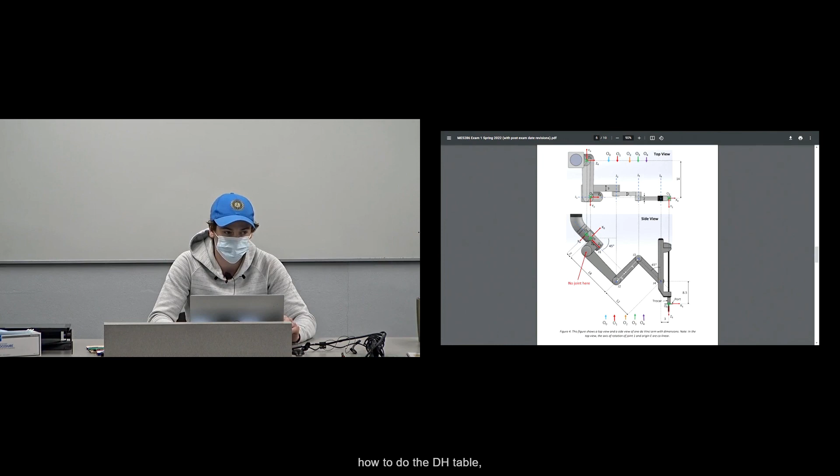Moving on. Like Professor Donath said, there was a bit of communication error, so we apologize for that. But like he also said, no one was punished with their grades for that. We made sure that if you showed understanding how to place origins, how to do the DH table, and how to write your A matrices, that you didn't lose any extra points, and you're actually given points for our mistake. So anyway, the main difference here, if you remember this figure from the exam, there were only 3 origins for you to place, O1, O2, and O3.

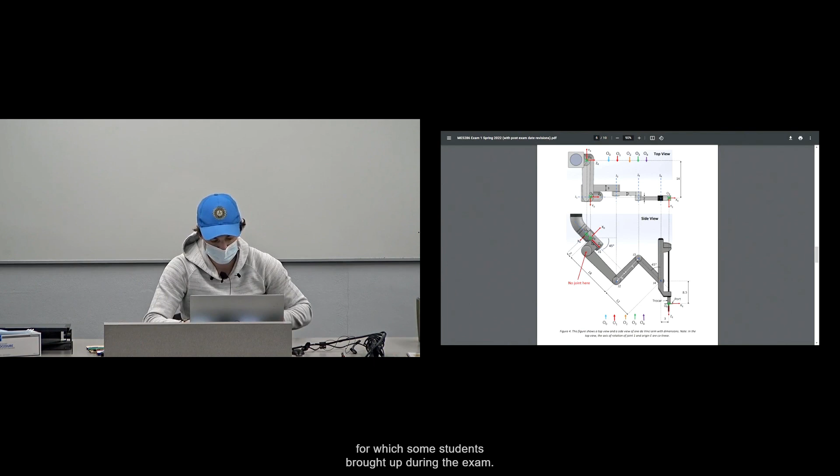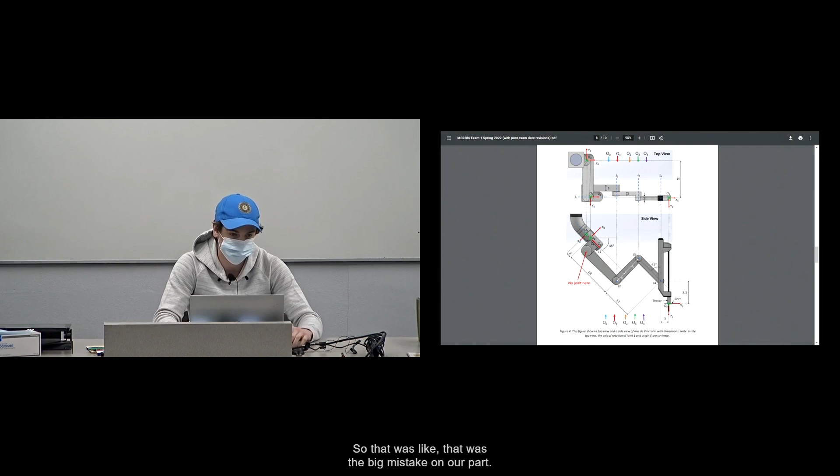In order to actually solve this problem correctly, you had to have an origin 4, which some students brought up during the exam. The reason we didn't include an origin 4 initially is because we're not considering a joint at the end effector. So really there shouldn't be a need for another origin. However, we need to get the z coordinate aligned with the z coordinate at the end effector. And the first solution with only 3 origins didn't have the z aligned. So really, to solve the problem the right way and get the right transformation matrix, we had to include another origin. So that was the big mistake on our part.

So essentially, if you showed understanding up until placing origin 3 and drawing coordinate frame 3, you should have gotten full points because there shouldn't have been any confusion up until that point. Okay?

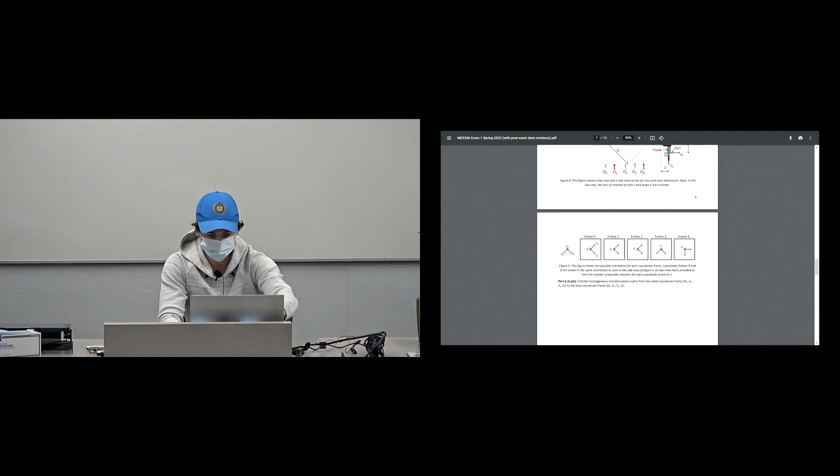So part A was pretty simple. It was a transformation matrix from the origin R, the robot frame, to the base coordinate frame. So if we're going to switch to the solutions here for a second, there was one rotation, and it was 180 degrees about r, or about z sub r, my mistake.

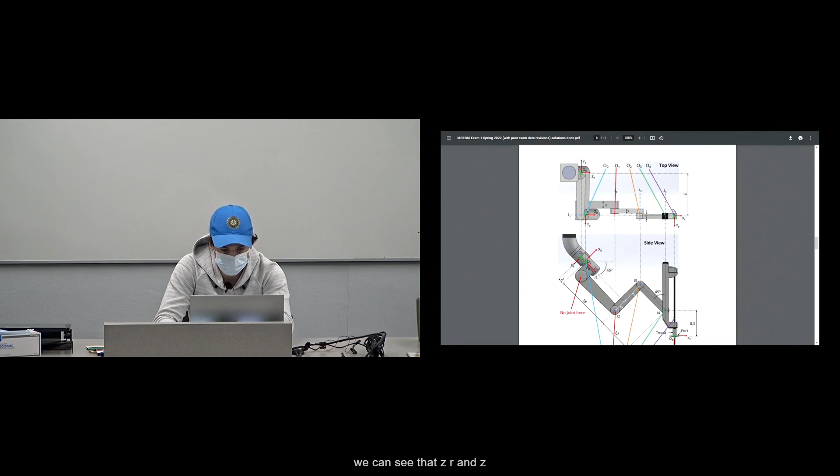So, using this view, we can see that zr and z sub 0 are pointing in the same direction, they're parallel. And to get that y sub r aligned with y sub 0, it's just a 180 degree rotation about z sub r. So pretty simple right-hand rule to figure that out. That's where this 180 degree rotation comes from. And then this R matrix, this rotation matrix, is for rotations about z. So just plug in 180 degrees and you get the first 3 by 3.

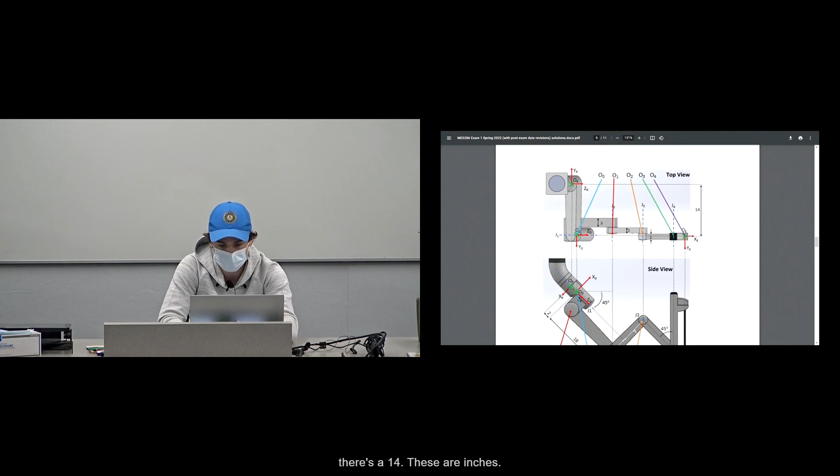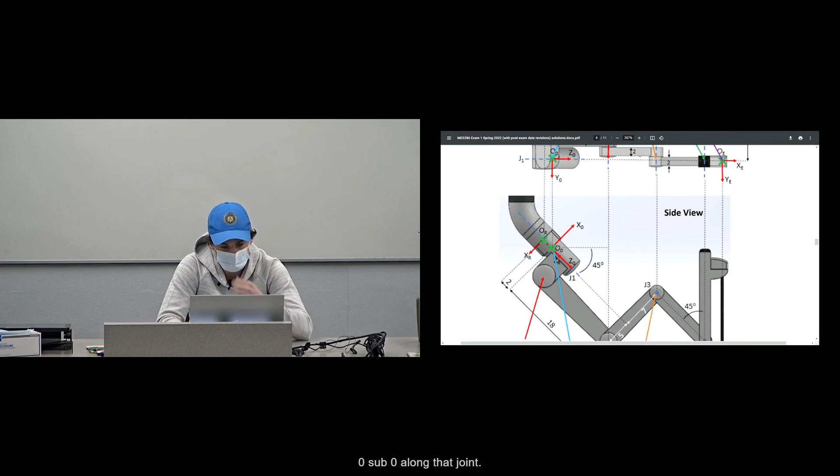And then the position vector. So we have a 0 degree or 0 translation from xr, negative 14 from yr, and 2 from z sub r. So again, going back to the diagram, we can see that if we zoom in here, that's a little blurry, but x sub r is normal to the distance or the displacement between the two origins. So there's no translation in x. If we look at the top view, there's a 14, these are inches, I'll just go with inches. There's a 14-inch displacement between OR and O sub 0, but since Y sub R is pointing away from origin 0, it's a negative 14. And then lastly, if we go back to the side view, Z sub R is pointing directly towards O sub 0 along that joint, and this distance is 2. So the translation in Z sub R is positive 2. And that is where this position vector came from.

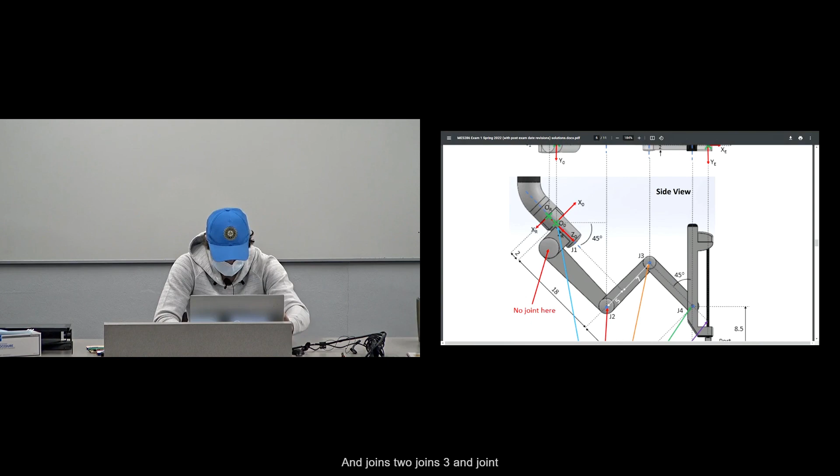And joints 2, 3, and 4 are all normal to the page, which is in the y sub 0 direction. So all the unit vectors to joints 2, 3, and 4 are just a positive 1 for y. Does that make sense?

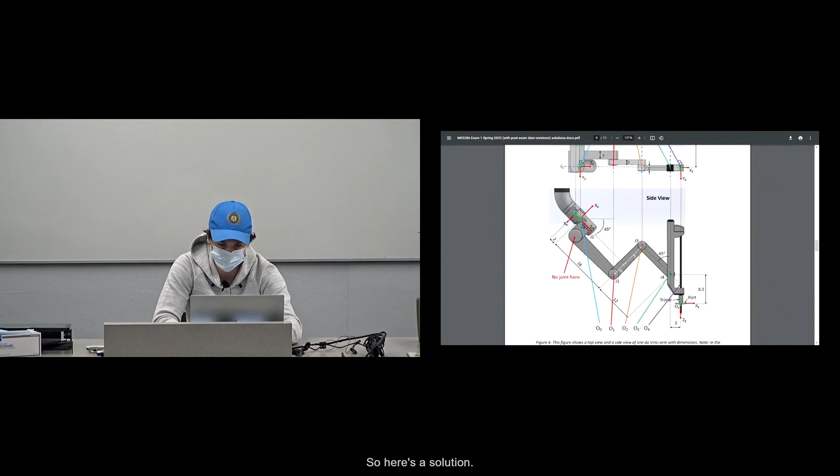Okay, part C is where some of the confusion started, I think, for some students. So this is where we have to place origins. And actually, up through origin 3, it should have been pretty simple. So here's a solution. Origin 0 is already placed, just to give you guys a freebie there.

We know origin 1 had to fall along joint 2, or the axis of rotation of joint 2. That's the first rule. So in the side view, we know it has to be at this point, just because joint 2 is normal to the page.

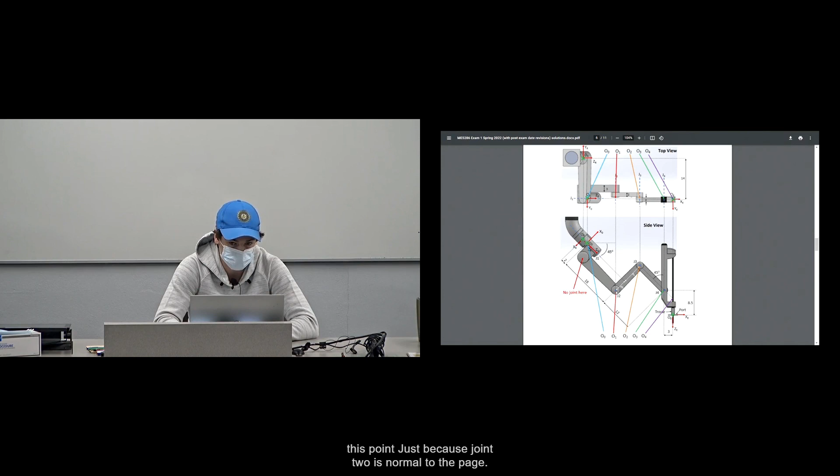And then in the top view, origin 1, again, along joint 2, had to fall in line with origin 0, along this dashed line that's horizontal. Pretty much all the origins fell along that line.

Origin 2 and origin 3 are the same story as origin 1. They fall on joints that are normal to the page. So in the side view, they're all going to be right on the joint axis. And then in the top view, they all have to line up with each other. So O3, O2, O1 all lie on this dashed line.

And for the exam you took, that's as far as you had to go for placing origins. But in order to get the true correct answer, we added an origin 4.

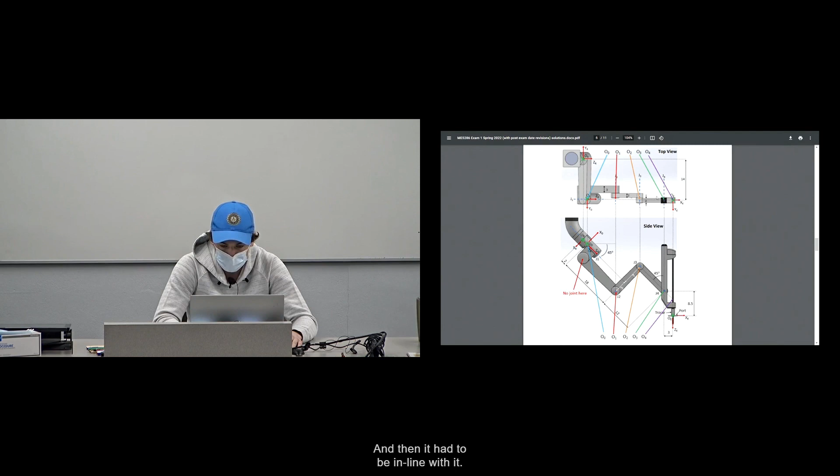So in the top view, origin 4 had to line up with origin 3, somewhere on this dashed line. And then the z direction of origin 4 is going to have to line up with the z direction of origin E. So it has to be along this vertical line that represents the instrument shaft.

So we placed it right here. This is blurry, but you can see we placed it right here, which would place it right above the origin E on the top view as well.

And again, you did not have to do that on the exam. If you tried placing an origin 4, you were given full points. As long as you got through origin 3 correctly, you were given full points.

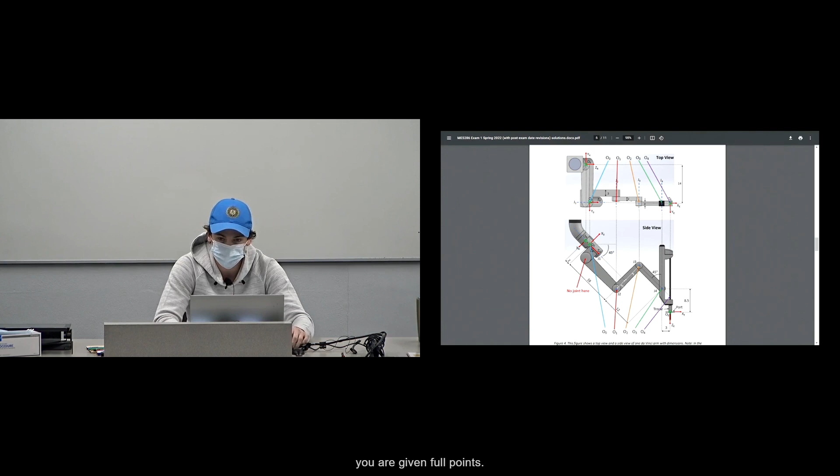And then the other part of this question was finding the coordinate frames. So here's that. You were given coordinate frame 0 and coordinate frame E, so we'll start with coordinate frame 1.

We know that z sub 1 has to fall along the axis of rotation of joint 2 because origin 1 is at joint 2. And since joint 2 is normal to the page, z1 is normal to the page. So these arrows are just going to be either x or y.

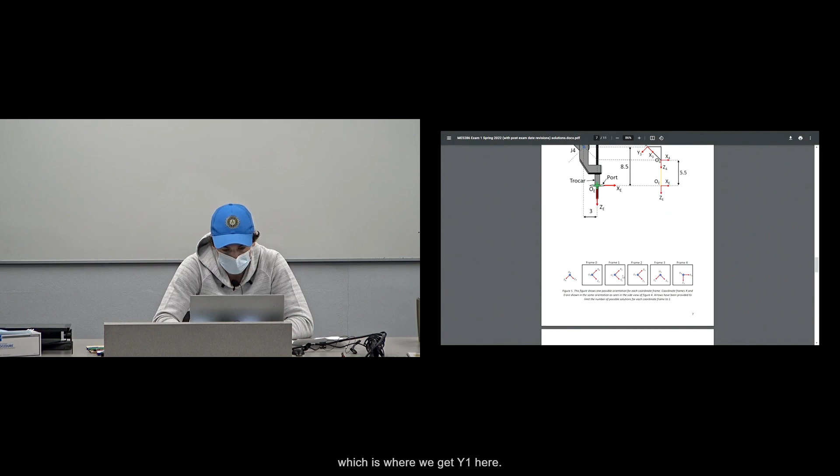Then y1 has to be parallel to joint 1. That's another rule. So in this view, joint 1 is at this 45-degree angle from the horizontal, which means y1 is also going to be in that same direction, which is where we get y1 here. And then since we have z and y, we can just find x. That's how I solved that one. Any questions so far?

All right, for origin 2, it's pretty much the same thing. So z2 has to fall along the axis of rotation of joint 3, which is, again, normal to the page in the side view.

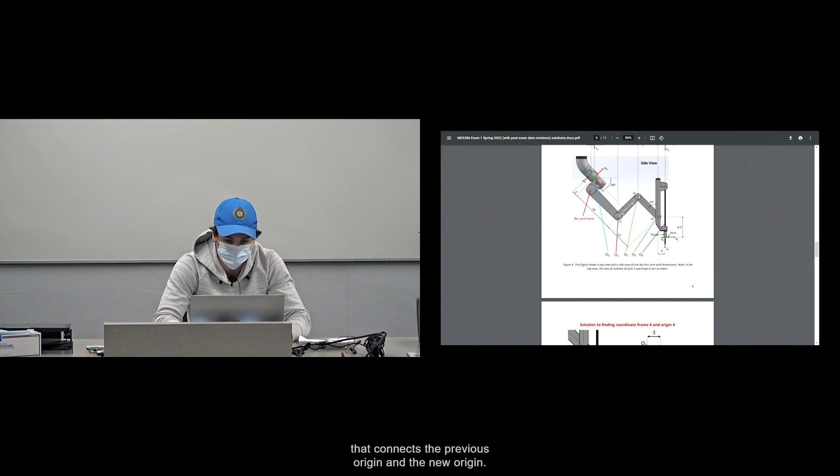And then this is one of those situations where y2 can't be parallel to j2. I went over this in the review slides. One of the rules when this happens is that x2 has to pretty much be in a direction that connects the previous origin and the new origin. So origin 1 and origin 2, x2 has to be in some direction along this line. That's where I got x2.

So in this situation, you solve for z and x first, and then place y based on those.

For coordinate frame 3, we have origin 3 along joint 4's axis of rotation. This is a similar situation where x has to connect joint or origin 2 and origin 3. So if you can see my cursor, it has to fall along this dashed line, which is where x3 comes in. Since we know z3 is into or out of the page, we can use the right-hand rule to find y3. If you got everything correct up to this point, you were given full credit for this question.

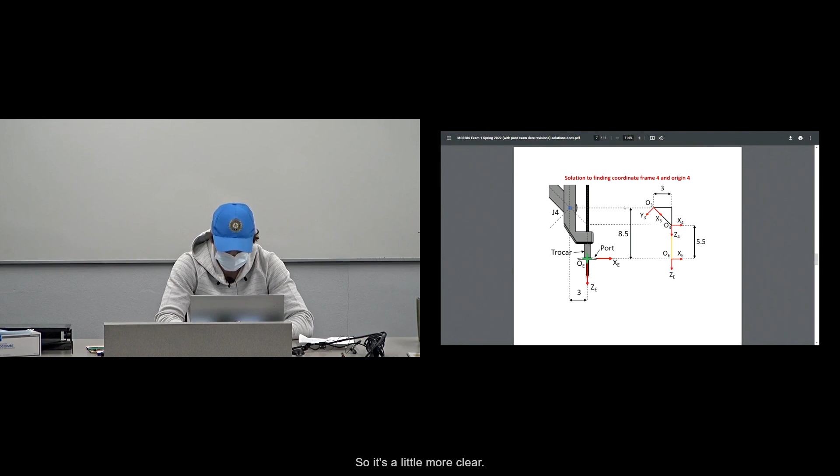I'm just going to go through how Professor Donath and I solved for coordinate frame 4. This diagram is how we did it. I placed coordinate frame 3 here, offset so it's a little more clear. Coordinate frame 3 is placed at joint 4, and we know that the z direction of coordinate frame 4 is going to have to line up with the z direction of coordinate frame E. So we know that origin 4 has to fall along this vertical line to fall in line with origin E.

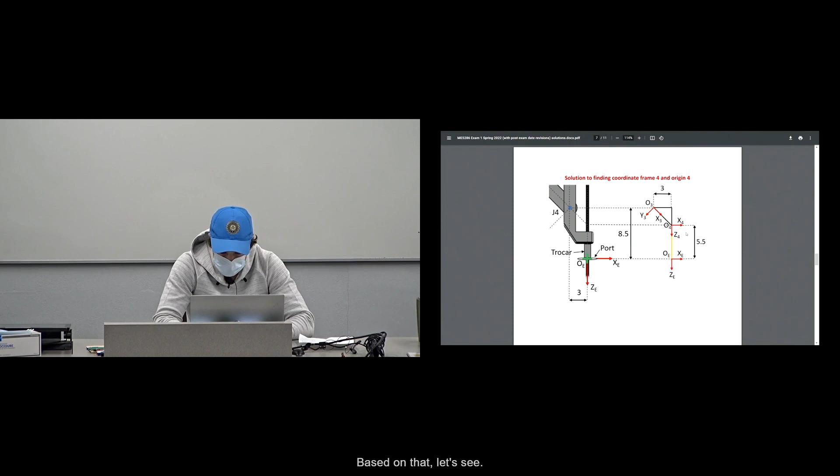Based on that, let's see. We wanted this final translation between 4 and e to be just a d in the DH table, so x4 and xe line up as well. And then y4 is just going to be, let's see, what would that be? It'd be out of the page, same with y sub e. Placing it here gave us the correct transformation matrix later on in the exam.

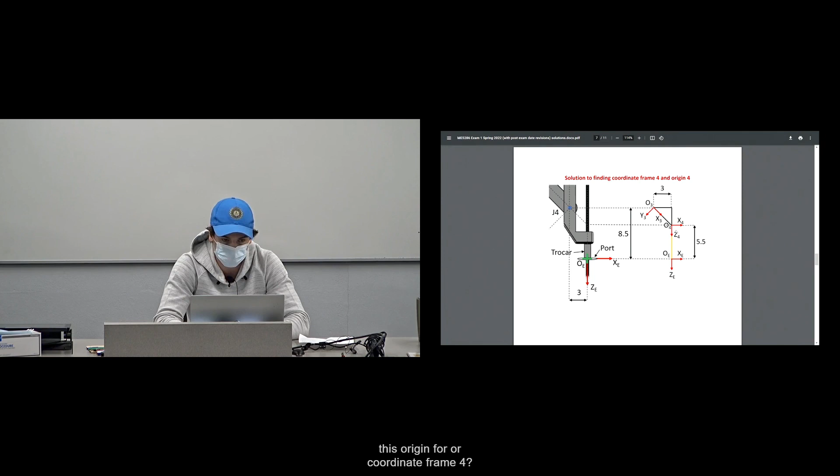Are there any questions how we got this origin 4 or coordinate frame 4? And again, if you got up through origin 3, you were given full points, so no need to worry there.

All right, we'll continue on. So we're through part C. Part D was the DH table, and again, a lot of students had a different answer for joint 4, but if you showed you knew how to do the DH table through joint 3, you were given full credit. We added another row here, which obviously was not there in the exam, but you need this extra row because we added an origin 4.

Okay, so I will run through how we solved for the DH table. Joint 1, we start with theta 1, which is the rotation about z sub 0 to move from coordinate frame 0 to coordinate frame 1, and there is no rotation about z. Let's go back. Again, moving from this coordinate frame 0 to coordinate frame 1, there was no rotation about z. We had a positive 90-degree rotation about x sub 0, so if you do the right-hand rule, that will get y sub 1 pointing down like it is here. So the only rotation for joint 1 was positive 90 degrees about x, which is the alpha value.

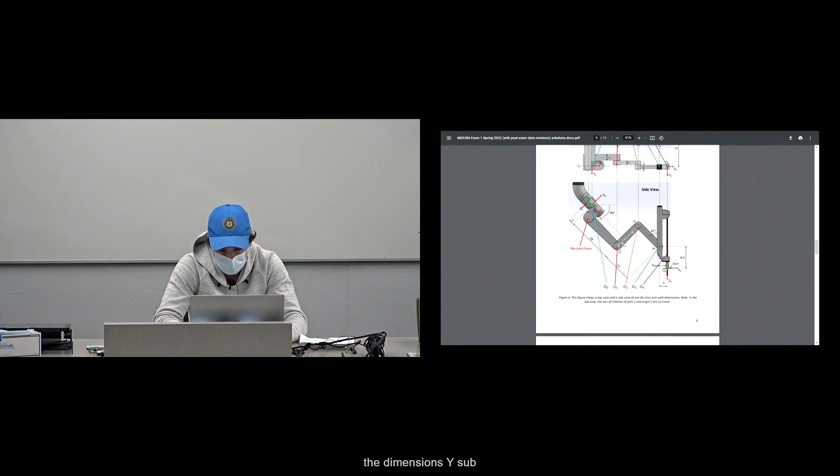Then to find d and a: d sub 1 is the distance. The way I solve it is the distance in the y sub 1 direction from origin 0 to origin 1. Again, y sub 1 is pointing down and to the right. And if we go back to the diagram with the dimensions, y sub 1 would be pointing down and to the right, and the distance in that direction from origin 0 to origin 1 is this positive 18.

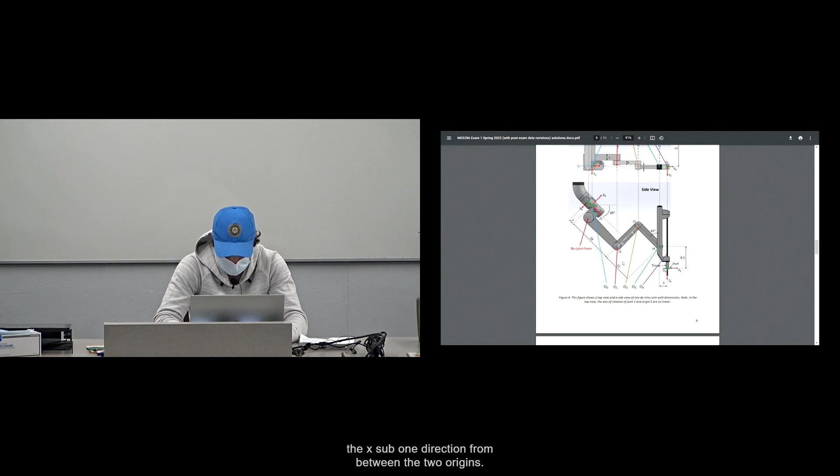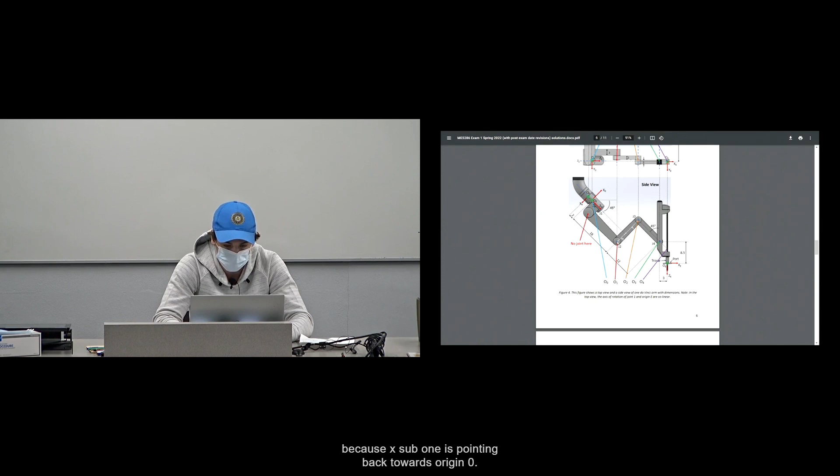And then a sub 1 is the distance in the x sub 1 direction between the two origins. So if we go back to the coordinate frames, x sub 1 is pointing up and to the right. This distance is 5, but since we're looking at moving from origin 0 to origin 1, this value is actually going to be negative 5 because x sub 1 is pointing back towards origin 0. So d and a are going to be positive 18 and then negative 5.

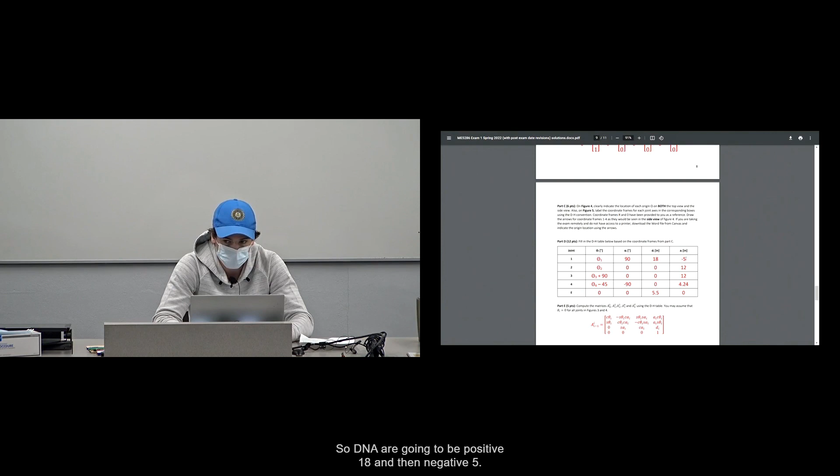Anybody got questions on that? Okay.

For joint 2, theta sub 2 is the rotation about z sub 1 to get from origin 1 to origin 2. As you can see, the coordinate frames are set up the exact same, so there's not going to be a rotation about z or x. So theta and alpha are both 0.

Then d sub 2 is going to be the distance in the y2 direction from origin 1 to origin 2. If we go back to the solution, origin 1's here, origin 2 is here, and y2 is pointing down and to the right, so there's actually no distance along y sub 2. That's why d2 is 0. And x2 is pointing up and to the right, so since a sub 2 is the distance in the x2 direction from origin 1 to origin 2, that's going to be positive 12. So it's 0, 0, 0, and 12.

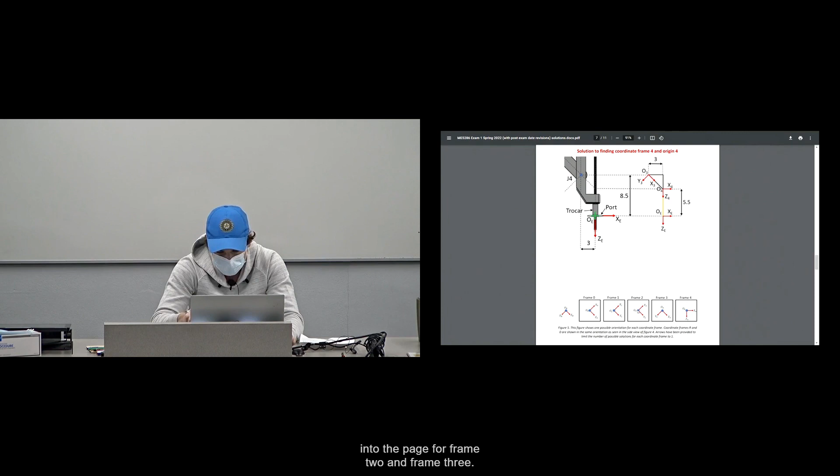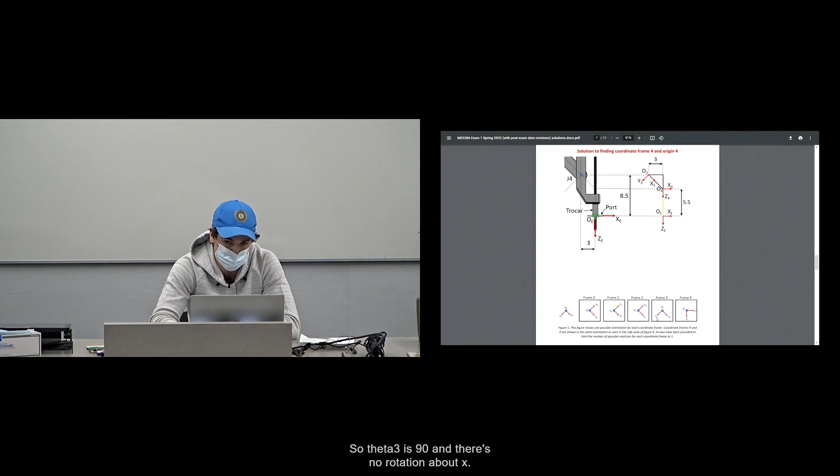For joint 3, looking at theta, it's the rotation about z2. Z is into the page for both frame 2 and frame 3. Since frame 3 is a little different orientation than frame 2, but x and y are still in the plane, we know there's a rotation about z. So a positive 90 degree counterclockwise rotation about z2 lines up x2 with x3 and y2 with y3. So theta 3 is 90, and there's no rotation about x, so alpha 3 is just 0.

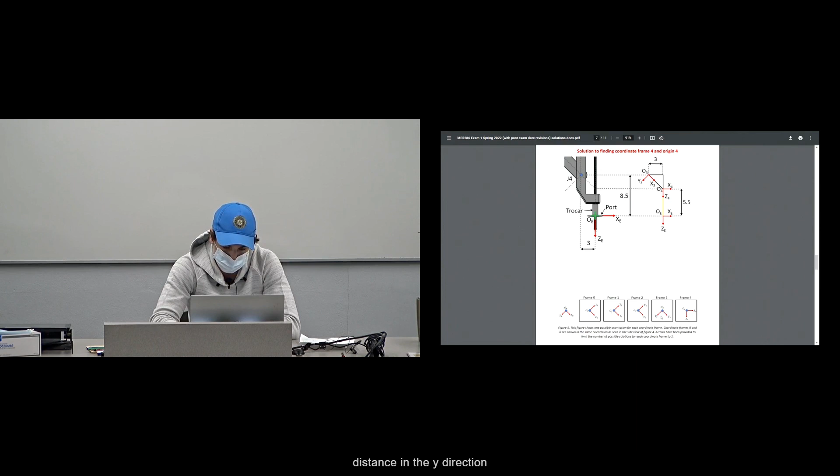D3 is going to be the distance in the y3 direction from origin 2 to origin 3. Going back to the diagram, y sub 3 is pointing down and to the left, and that's normal to the displacement between origin 2 and origin 3. So d sub 3 is also 0.

Finally, x sub 3 is pointing down and to the right, and a sub 3 is the distance in that direction from origin 2 to origin 3, which is a positive 12, as seen here. So we're going to have a 90 degree rotation for theta, 0 for alpha, no d, and 12 inches for joint 3.

To reiterate, if you showed that you knew how to do the DH table and got joints 1, 2, and 3 correct, you were given full points for joint 4, no matter what you put. We're still going to solve for joint 4, though.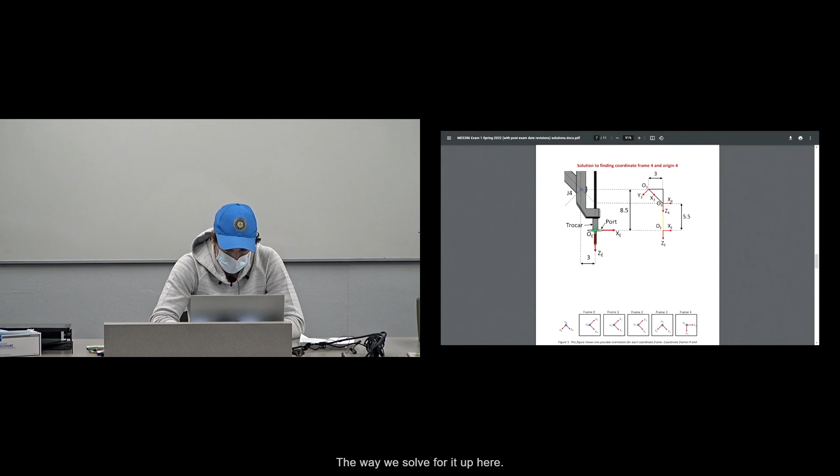The way we solve for it: we have y sub 3, x sub 3, and then we need to get z sub 4 in the plane, so we know there's going to be a non-zero alpha. The first step is solving for theta, which is again rotation about z sub 3, which is into the page here. The goal of this rotation is to get x sub 3 and x sub 4 parallel, so we have to rotate 45 degrees to get x sub 3 along the horizontal.

When we do that, y sub 3 is pointing down, and we know we need to get z4 pointing down, so there has to be a rotation about x sub 3, and that's going to be negative 90 degrees. So that's how we get the angles for joint 4.

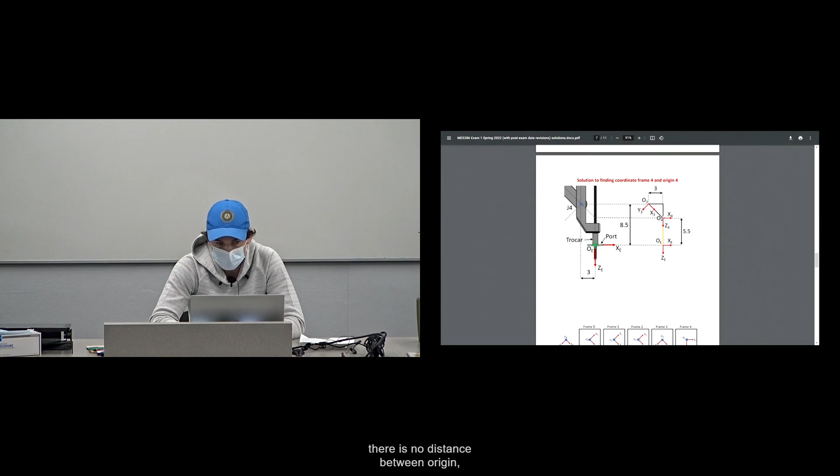For D4, there is no distance between origin 3 and origin 4 along y4, because y4 is now coming out of the page and they're collinear in the plane. So D4 is 0.

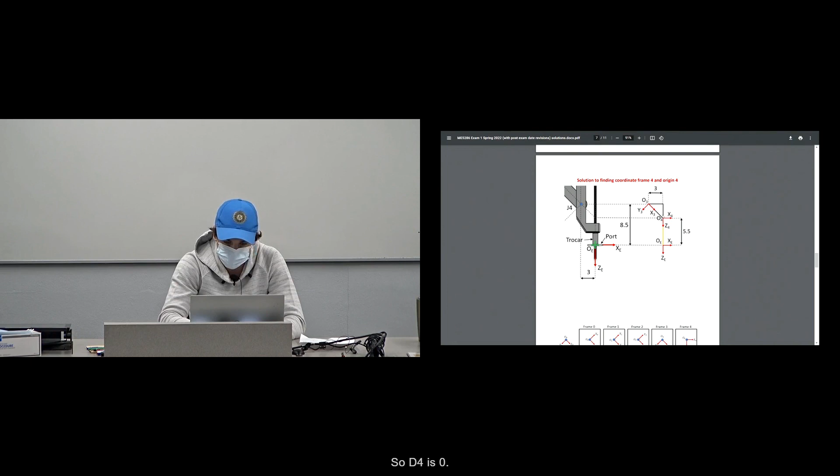A4 is, since there's a 45 degree offset here, A4 is the hypotenuse of this triangle, and that's just 4.24 inches.

The last row is just translation from joint 4 to joint E, or origin 4 to origin E. Since the coordinate frames are now lined up, there's just a 5.5 inch translation, and that's the D value. So that's how we solve the DH table.

Everyone's going to have a different answer for joint 4 most likely, because there was some confusion. But if you showed you knew how to do it from joint 1, 2, and 3, you were given the points for joint 4. We wanted to make sure no one was punished for our mistake.

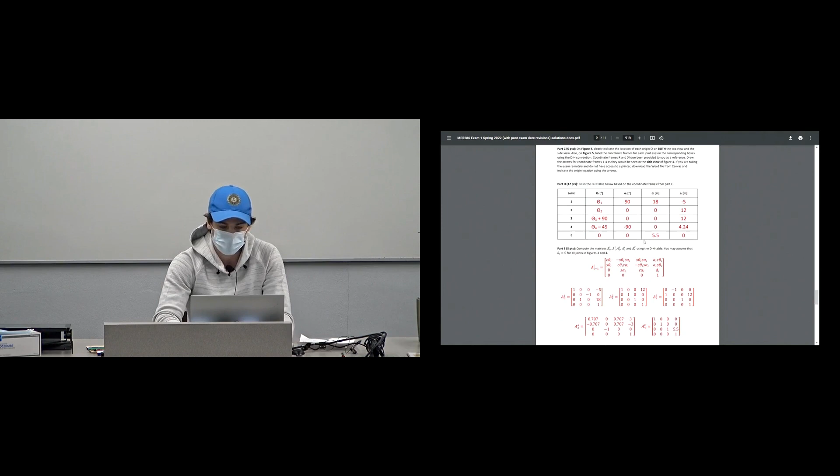This new exam, since there's another row of the DH table, we added a matrix to find. This is pretty simple, it's just plug and chug from the DH table.

There are a few examples where students got wrong answers in the DH table but still found the A matrices correctly based on their DH table values. You were given, I think, half credit for knowing how to do it and having the correct method. You lost some points though for having the wrong DH table.

But anyway, again, it's just plug and chug, no need to really go over how we got it. As long as you did the correct method, which is this matrix right here, you likely got full points.

Part F was just a matrix multiplication sequence to find the transformation matrix from the robot frame to coordinate frame 3.

So we solved for the transformation from R to 0 in part A. That's the first step. And then just multiplying by 3 A matrices, you see the zeros, the 1s, and the 2s cancel, and we're left with the transformation from R to 3. This one was pretty straightforward. Anybody have questions about that or anything else I've gone over?

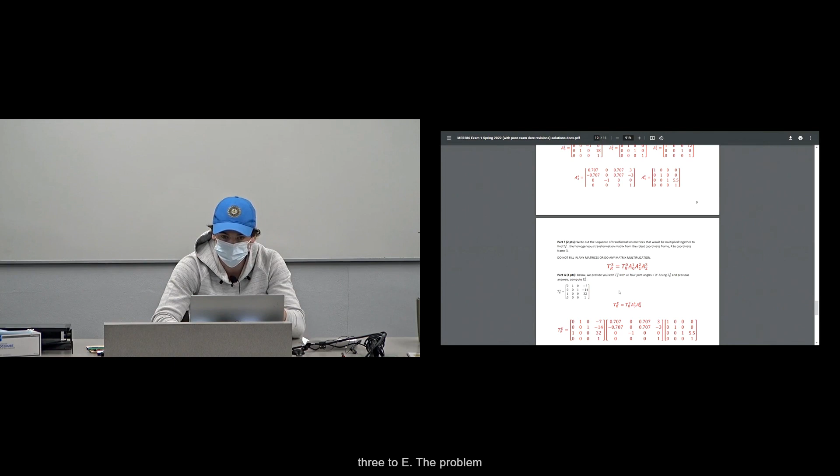Moving on, part G. This was one where you had to multiply—in the real exam you took, you were given TR3, and then you had to multiply that by the A matrix from 3 to E. The problem is, since there was an issue with the exam, the joint 4 row of the DH table was different for everyone, and that's where you got the A matrix from 3 to E. So there were a wide range of answers for part G. If you showed the correct multiplication sequence, you were given full points for this part. It didn't matter what your final answer was, as long as you showed you knew how to get that transformation. That's all you needed to show.

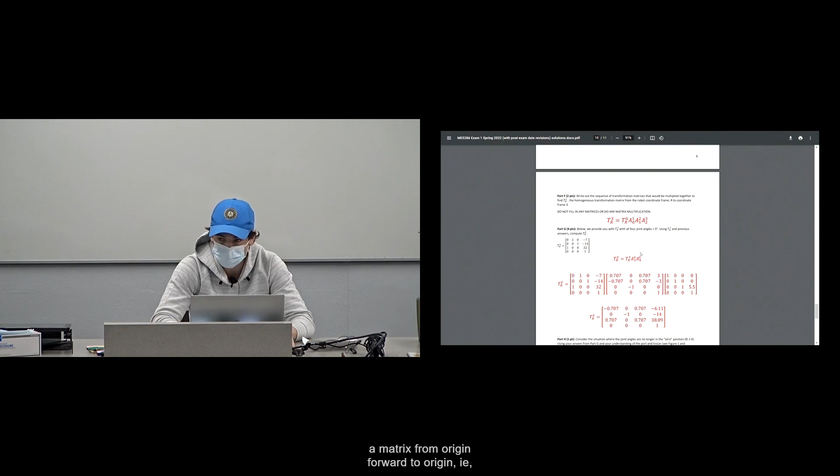For this exam, though, since we added a row and there's now an A matrix from origin 4 to origin E, we'd have to multiply the transformation from R to 3 times 2 A matrices, as seen here. And this is the final answer.

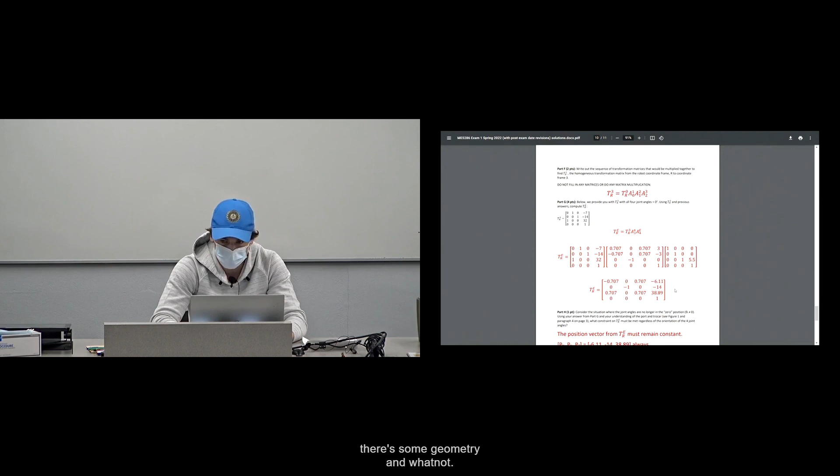One way to check—so a few students brought this up during the exam—when they solved this transformation matrix, they got a y that was not negative 14. If we go back to the diagram on this top view, since all of these origins are in line, we know that the position vector, or the distance in y sub r to the end effector, has to be negative 14. That was kind of what tipped me off that there might have been a problem here, because intuitively this has to be negative 14 just based on the schematic. Obviously the x and z are a little more difficult to solve because there's some geometry involved, but since there's a negative 14 here, that should tell us this is likely the correct transformation matrix.

To reiterate, if you showed the correct multiplication sequence, you were awarded full credit for this part.

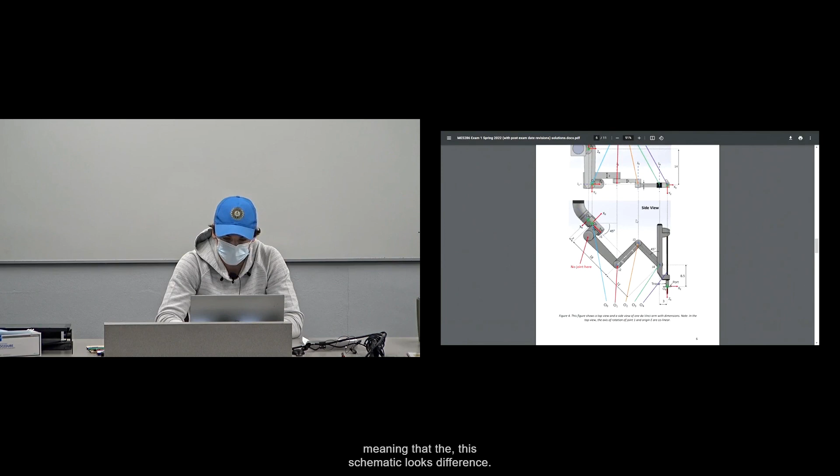The last part of problem 1 tested your understanding of the robot and made sure you were reading about it in our description. So if we're considering a situation where, let's say, the joint angles are non-zero, meaning this schematic looks different—let's say it could be anything, joint 2, joint 3, and joint 4 could be at a different angle—the question is asking what about this transformation matrix has to stay the same.

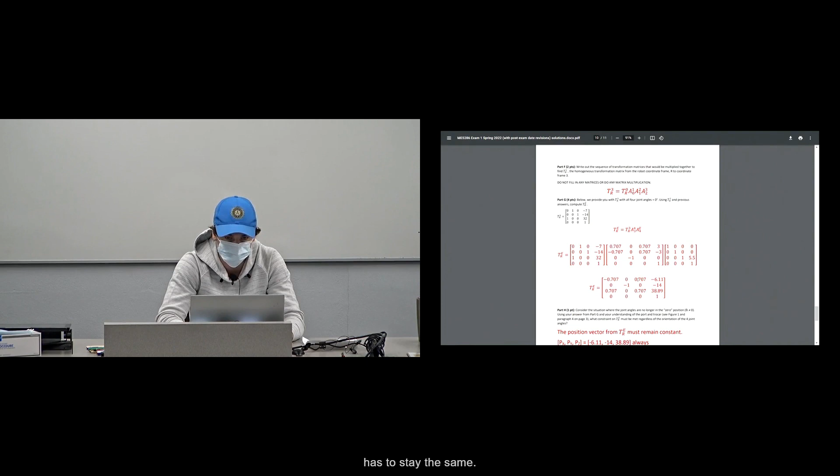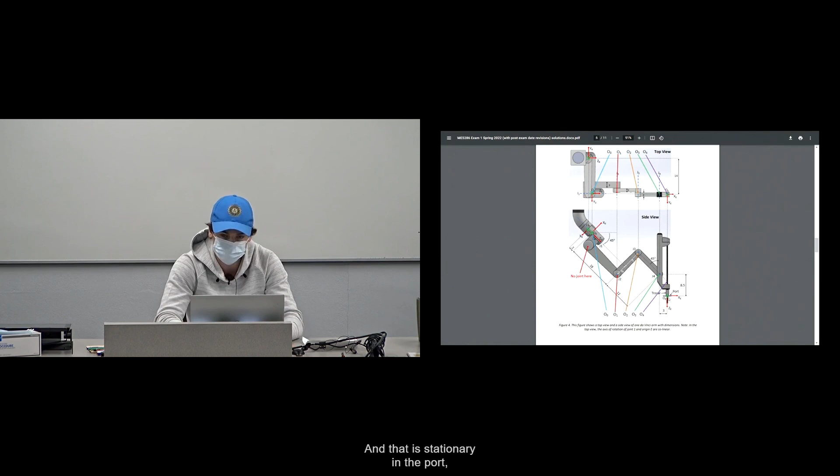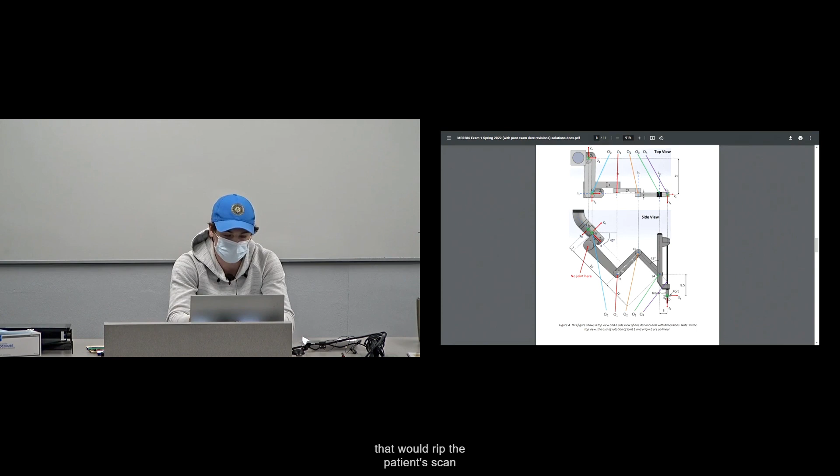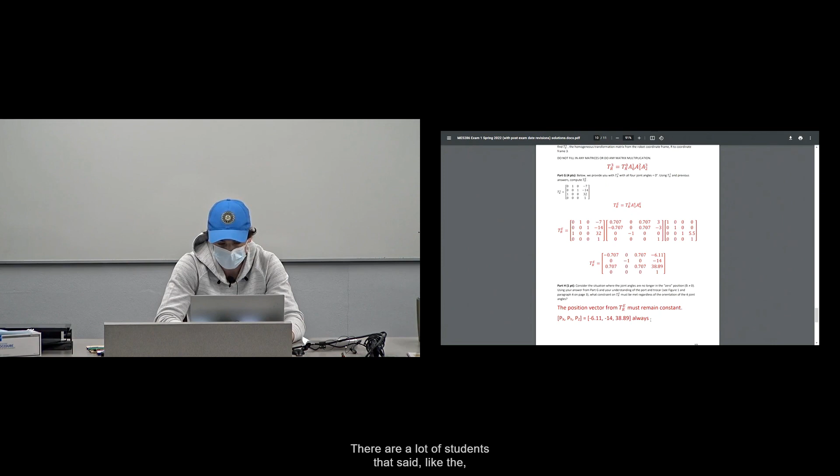And the position vector cannot change. That's because, if you remember about the robot, the trocar here is where the end effector is, and that is stationary in the port, which is essentially the incision in the patient. We consider that like a spherical joint about the port—it can twist all sorts of ways, but it cannot move or translate anywhere, because in a surgery that would rip the patient's skin or cause damage. So we were looking for something about the position vector. There were a lot of students that said the Z had to stay the same. If you were one of those students, you got partial credit, but really the entire vector itself can't change, no matter what joint angles you have.

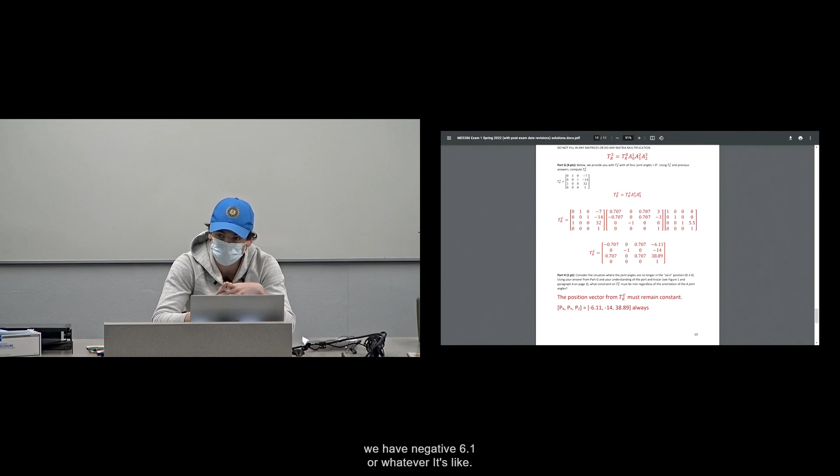Is that clear? So if we didn't have the negative 6.11 or whatever, it's fine as long as we said Px, Py—yeah, you got full points for that. If you said position vector, if you said Px, Py, Pz, if you put your values but they didn't match up with what I had, it didn't matter. You still got full points.

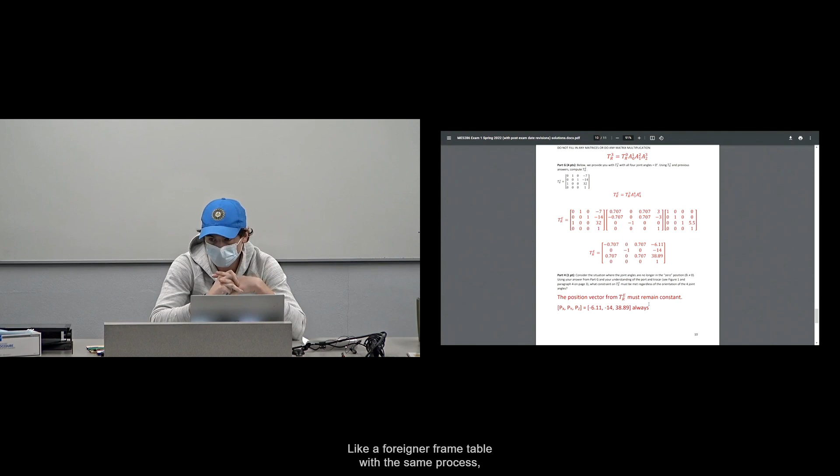So the question I have about the test in general—if you mess up something with a coordinate frame, which leads to a wrong transformation of the DH table, but you did the same process correctly, which then led you to the wrong answer in the matrix multiplication, is that kind of... that's probably a severe mistake?

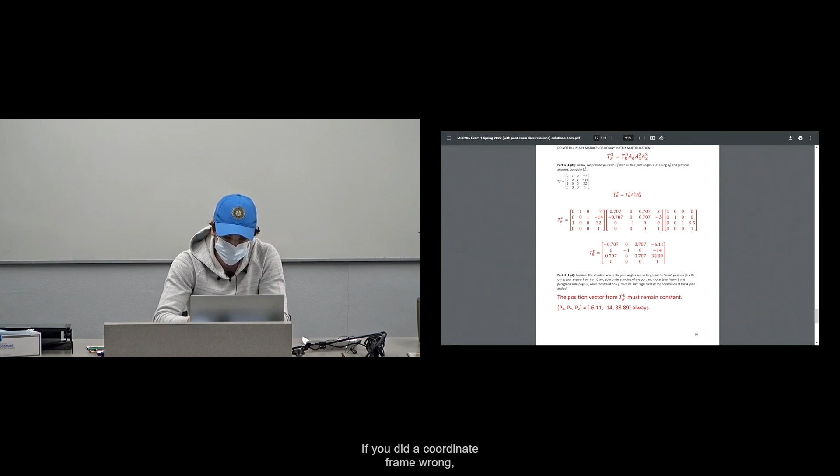Well, for matrix multiplication in part G, if you had the right sequence, you got full points. If you did a coordinate frame wrong, it cost you a little bit. You still got some credit for doing the correct method, like the DH table and the A matrices. Does that make sense? Yeah.

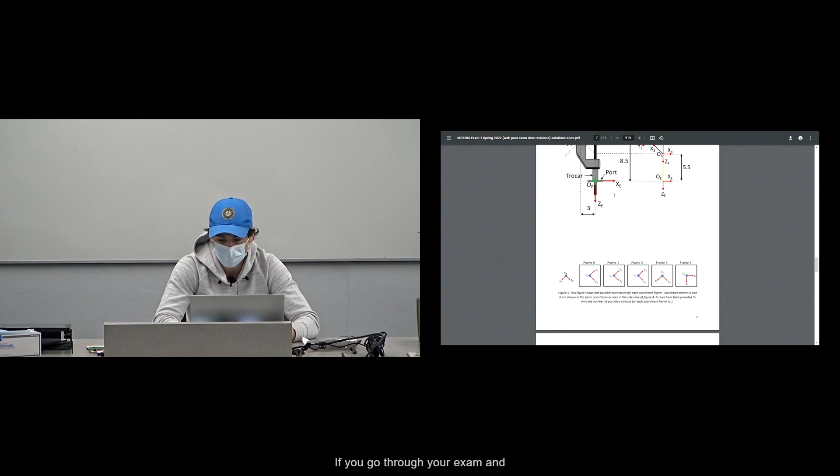Okay, so I get that this is kind of step-by-step, each step depends on the previous step. So if you placed origins wrong, that's going to affect everything. If you did wrong coordinate frames, it's going to affect things. But we tried giving partial credit for your method. Make sense? Yeah. And if you go through your exam and you have an issue with it, just let me know, and I'll try and work that out.

If there aren't any questions on question 1, we'll move on to problem 2. This was just roll, pitch, yaw, multiple conventions. There were a bunch of right answers I saw for part A. Most people got this question completely right. I just listed 3 solutions I saw in the exam that gave the right orientation of the coordinate frame 4 here.

For part B, there are 2 possible situations given here. Some students did an X, Y, Z rotation, and some students did a Z, Y, X rotation, both of which were fine, they were correct answers. I just listed 2 Z, Y, X rotations here that are correct.

Anyone have any questions about the roll, pitch, yaw? It seems like the class was pretty clear on this concept, which is good to see.

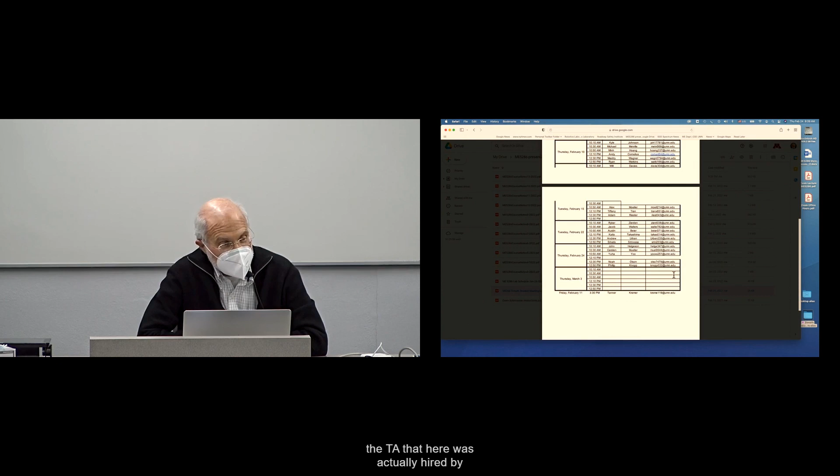I should point out that a number of years ago, I won't say what year, but we had an exam that dealt with this type of surgical device, a predecessor of the company that now makes the particular machines used in the exam. And if I remember correctly, the TA that year was actually hired by that company when they graduated and moved off to California. Anyway, it's an interesting machine.

What I do suggest, we're going to post the solution on the web. I do want to go over with Robert a few little things before he posts them, so it won't show up quite yet this afternoon, but I hope it'll be posted by tonight so you can take a look at it. I do appreciate that you need to spend some time looking at it. You can't just follow it all in the few minutes that he was presenting it. You need to do your own thing with understanding where the X, Y, Z's move their way around from beginning to the final E vector where the trocar is in the machine.

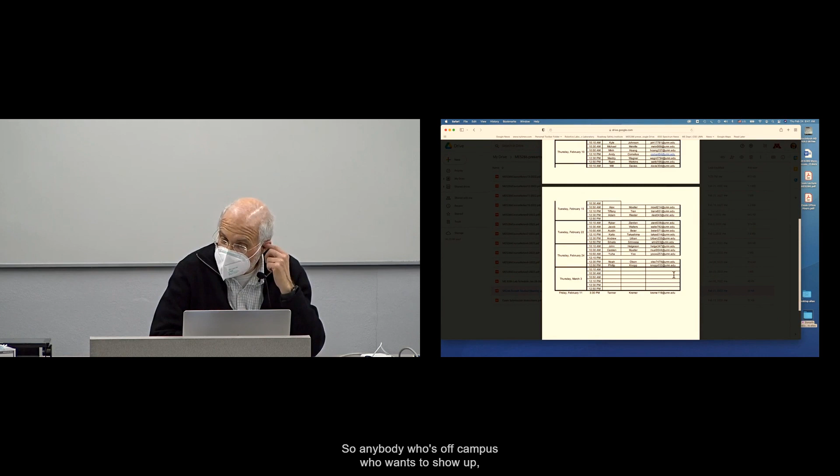It's Thursday today. Next Tuesday, I am going to bring some instruments into class. So anybody who's off campus who wants to show up, you can come next Tuesday, and I will bring instrument shafts through. Those instrument shafts add another 5 degrees of freedom. So beyond what you saw in the exam, there are another 5 degrees of freedom that are controlled by the surgeon directly through a teleoperated arrangement. I will show you what I'm talking about next Tuesday. But that part was not part of the exam, and you don't need to know it. I didn't want to confuse anybody by getting into all the details of that portion.

What I mean by that is, if I have a robot, and now we're talking about a robot that makes contact with the world - I'm doing stuff, and I have, for example, got a pen, and I'm actually making contact with the world, and there's going to be forces that push back. There are reaction forces over here.

What is the propagation of these reaction forces to the individual joints? In other words, what is the torque at each joint that either is going to generate the reaction forces, or if I have certain reaction forces that I can measure, what must the joint forces or torques be?

Now why is that important? Well, notice I use the word static. We're basically talking about a situation without the dynamics. We'll get to dynamics still in the discussions. When we talk about dynamics, then we need to worry about inertial forces, Coriolis and centrifugal forces, and all sorts of other forces that play a role.

But if I'm talking about static conditions, we're talking relatively slow motions - just like if you were doing isometric exercises, pushing up against the wall and exercising yourself, you're not moving through large motions. We're basically thinking of it as being a rigid body in some sense, and we're trying to calculate what the reaction forces in the system are.

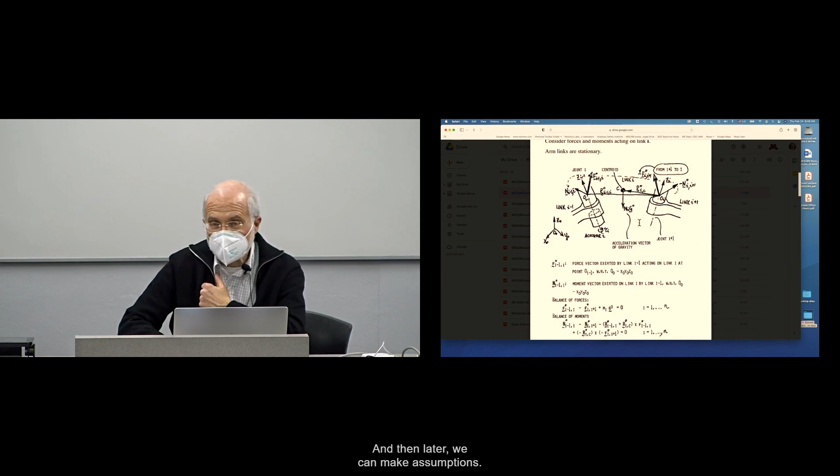So if we look at all the forces and torques going on, we haven't talked about gravity yet, but if we're beginning to talk about a system that has mass, we're going to add the gravitational term. I'm bringing this up because we will bring up gravity when we start talking about dynamics, and we cannot ignore gravitational terms. Right now, we're going to include it just to explicitly show it, and later we can make assumptions about whether we consider the gravitational effect or not.

If we're dealing in this direction, gravity is important. If we're moving in this direction and you have suitable bearings to handle all the reaction forces, then the gravitational effect is not that big a deal, unless you're talking about a very large mass at the end and you haven't designed your robot appropriately, and it's actually flexing under load, in which case gravity is certainly a big deal.

So if we're talking about rigid components, rigid links, no slippage in the joints at all, then we're going to basically have the coordinate system with the center O sub I minus 1, and here's O sub I. There's Z sub I, here's O sub I minus 1, there's Z sub I minus 1. Now what we need to add, as soon as we throw in a gravitational term, we're going to have to worry about the centroid.

The centroid of this link, of the mass, essentially the mass effect, basically mass times the gravitational vector, is going to act through the centroid of that particular link. Calculating where that centroid is, is not an easy thing, and we're not going to need to calculate it for the analysis we're going to talk about. But I'm showing it to you explicitly, if we were going to throw in the gravitational terms, I'm just going to show you where it appears.

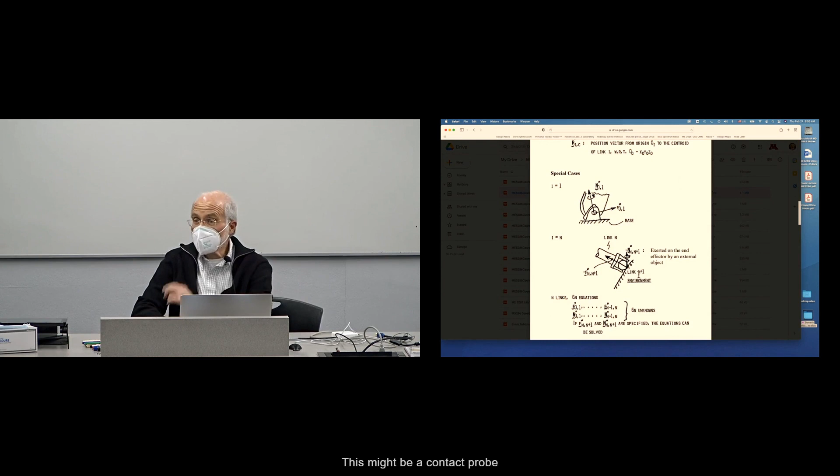If you look at the end conditions, at the base of the robot, there's going to be some reaction forces and torques. You might put it on an instrumented platform and measure those, for example. And then you have the end effector, which may be holding something. This might be a contact probe that you're pushing into the wall, or a piece of chalk scratching across a blackboard. It's doing some activity where you're interacting with the world, so there is going to be a force and torque applied by the outside world back on the robot itself.

We're going to take a look at some examples later on. I'm going to take you to some websites, but there are companies whose mission is to control exactly what the forces and torques are as you apply to a surface. Typically, grinding is such an application—there is robot-controlled grinding of surfaces, polishing of surfaces. There are many activities where you have to apply forces in a controlled manner to a surface.

What you might be doing is pushing with a constant force against the surface here and not applying any force in that direction, again depending upon what the objective is with your tool.

If we take all of this together, spell everything out and write it out, we're going to get an unbelievable amount of equations. Because remember, if we just look at the forces, if there are n joints, we're going to end up with 6 times n unknowns just from the forces—3n unknowns, and then we add the moments, we get another 3n unknowns. Together, we have 6 times the number of joint unknowns we're trying to solve.

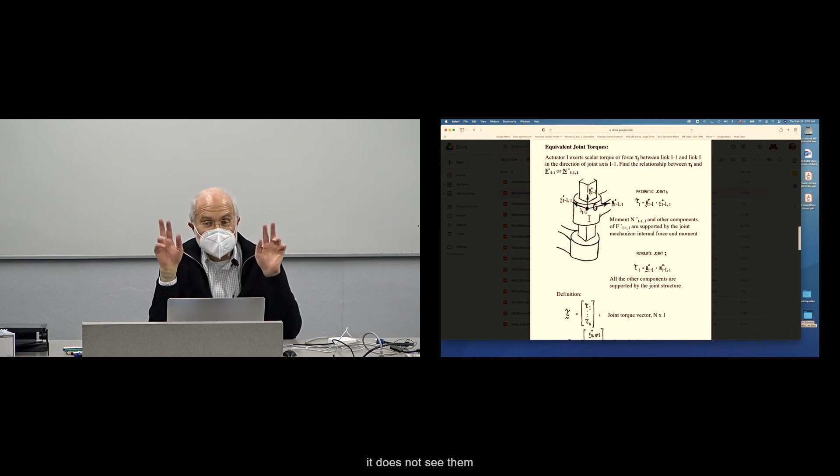It's going to be dotted, so to speak, with the unit vector. So in effect, this revolute joint, the motor, the actuator, and the transmission, whatever is being applied at that particular joint, its mission is to handle the components of the reaction moments applied at the joint, via the dot product, acting along or about that particular unit vector. If there are moments not in the right direction as far as the motor is concerned, it does not see them, because the structural elements of the robot, the bearings designed into it, pass them down to the ground and they are never seen or felt by the motor.

Now later on, we're actually going to do a pretty detailed analysis where we're going to include the effects of a transmission, but we're going to do that much later on, and I'm going to show you that the transmission ratio in a transmission plays a very important role in robots.

We want to have a transmission. The transmission does a lot — call it a gear ratio or the transmission ratio. It's going to have a very positive effect on our ability to control and move a load around in space. But for right now, keep in mind we're dealing with static conditions, no dynamics, and because there are no dynamics, we're not going to be concerned with inertial effects.

When we talk about dynamics, we're going to need to worry about inertial effects, Coriolis and centrifugal forces and all sorts of other things. But we're dealing with a rigid structure. There's no compliance in the joints, or we're going to say no compliance in the transmissions. And in effect, we're dealing with static force conditions — there's no dynamics playing a role.

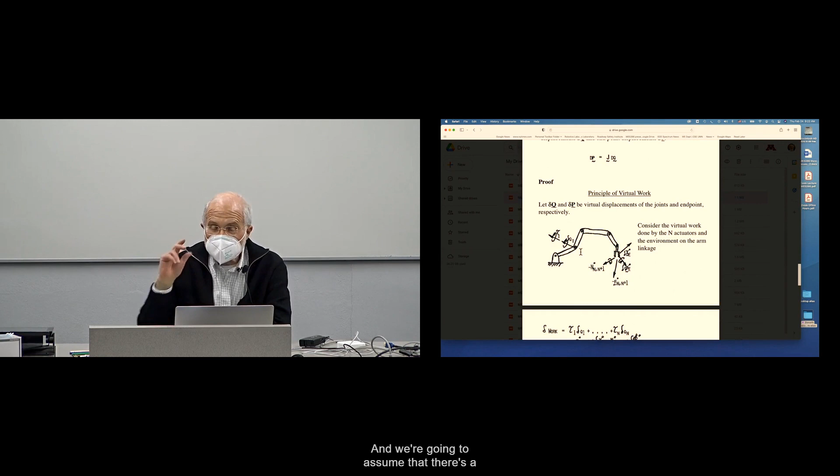This looks like a very complicated deal. It isn't as complicated as you think, because at each motor, what do you have? We're going to have a torque. Let's say it's the revolute joints. There's a revolute joint, and we're going to assume that there's a very small—and we'll see—very small angular change at that particular joint.

So there's a tau sub i and a del Q sub i. That means at the motor, there's going to be a tiny rotation and a torque. And together, what is the product of force times displacement? Force times displacement is work, energy, right? And if I do force times velocity, what do I get? Power, all right? So force times velocity is basically force times the derivative of displacement. We're not talking about power here, we're talking strictly about energy. So essentially, if I have an actuator applying torque, this is applying energy into my system.

And there's going to be at this joint, at that joint—there are going to be a bunch of joints in my robot, and each actuator is applying a little bit of work.

Let's call it virtual work. At the end point, this is where the rubber hits the road, where the end effector is making contact with the outside world. There's going to be the moment applied to the robot, that's minus n, and the force vector applying to the robot, that's minus F.

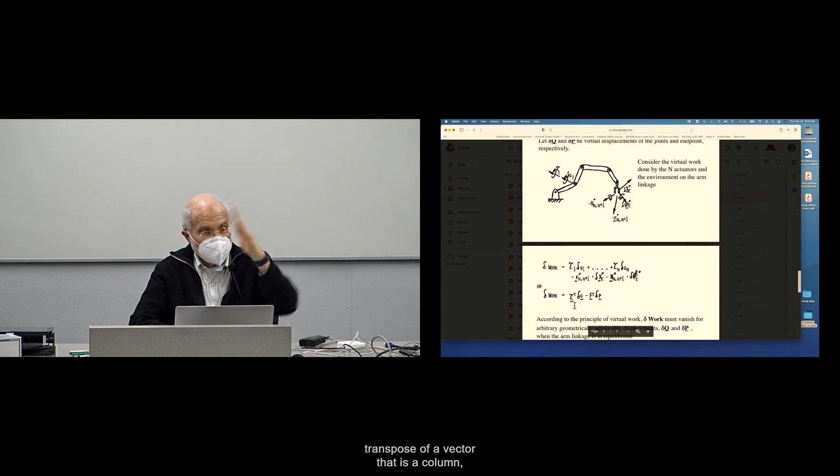We can then combine all this, and we can combine it if we take the transpose of a torque vector. Remember, tau is a vector, n by 1. And we're going to multiply it by another vector, but this is going to basically be, we take the transpose of a vector that is a column, then becomes a row. All right, the transpose of a column becomes a row. So the tau transpose is essentially a row vector multiplied by a column vector.

So this is essentially a product. And minus, again, it's the same basic thing. We're going to take the force transpose. Again, force is the set of three forces in x, y, and z. And it also combines now the three torques along x, y, and z, multiplied by the small displacements at the end point, which is del p.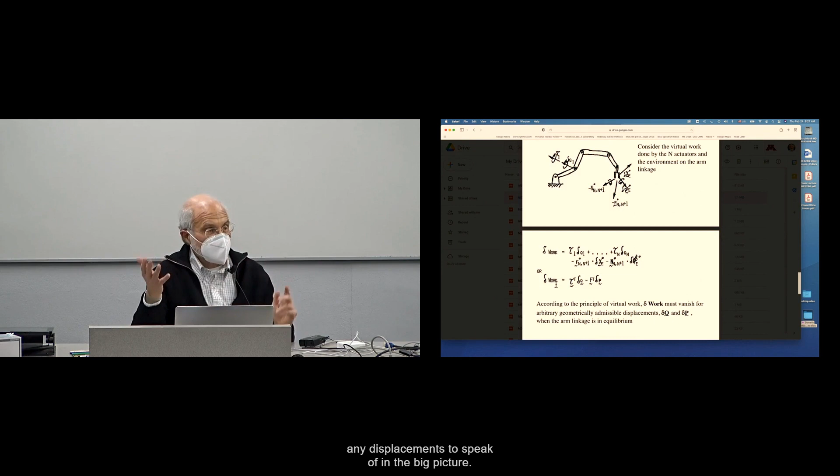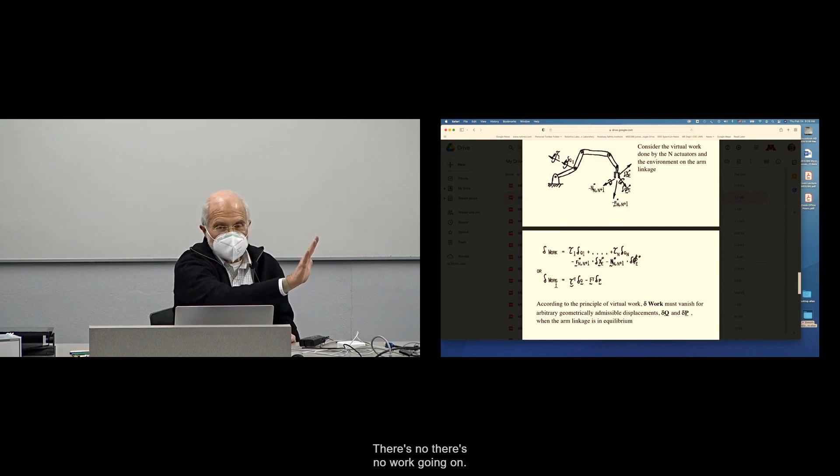Now, the whole point of doing this kind of analysis is if we're talking about any particular geometry, essentially we're talking about really tiny displacements of del q and del p. We're basically going to say there's no real work being done by the system. This del work is equal to 0. Nothing's moving. There really isn't any displacement to speak of in the big picture. Essentially, the robot is making contact with the wall, and then I'm pushing against the wall. There's no work going on.

Now, you might say, I as a human, if I'm doing push-ups, clearly we're doing some work. But just not doing anything and just pushing against the wall, your muscles are actually contracting. There is real work going on inside your muscles, even if you don't see your arm moving. But the bottom line is, in this analysis, del work is equal to 0.

And when we do that, we are going to be able to see that there's a very neat relationship that comes out of this: the geometrical constraint is simply del p is equal to the Jacobian of del q. Remember what that means? The Jacobian, by definition, relates small changes at the end effector. Small displacement changes at the end effector are related to small changes at the joints. So del q is essentially a vector of small displacements at each joint. Del p are small displacements at the end effector.

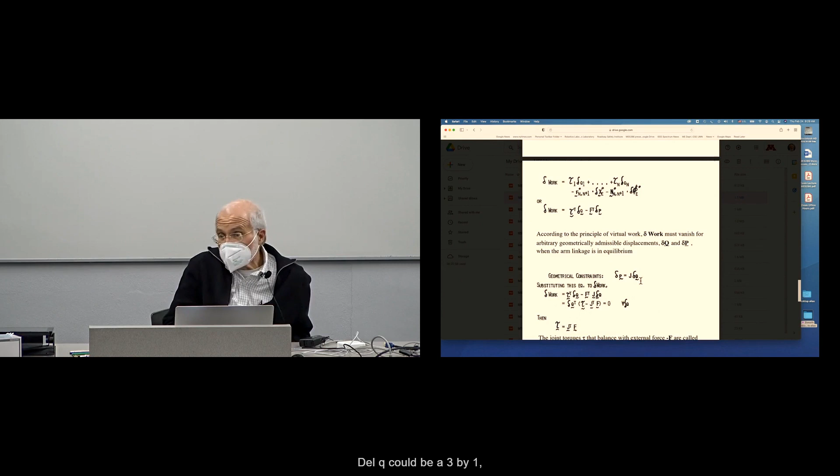This is basically a 6 by 1. Del q could be a 3 by 1, it could be a 4 by 1. But if we're talking about 6, then this will be a 6 by 1, and the Jacobian will be a 6 by 6. If del q is only 3 elements, then essentially your Jacobian is going to be 6 by 3.

So if we have this geometrical constraint, which is essentially the definition of a Jacobian, then we can do some plugging in. Here is this del work. I'm just going to take this equation, and now I'm going to substitute into this equation for del p.

You see this del p over here that my arrow is pointing to? I'm going to replace del p by J del q. And when I do that, I get this equation over here: tau transpose times del q minus F transpose times J times del q.

I get this result. And now I can play with my transposes a little bit, because what I've done is I've pulled out, and basically I've given you some equations for transposes. If you take the transpose of two matrices,

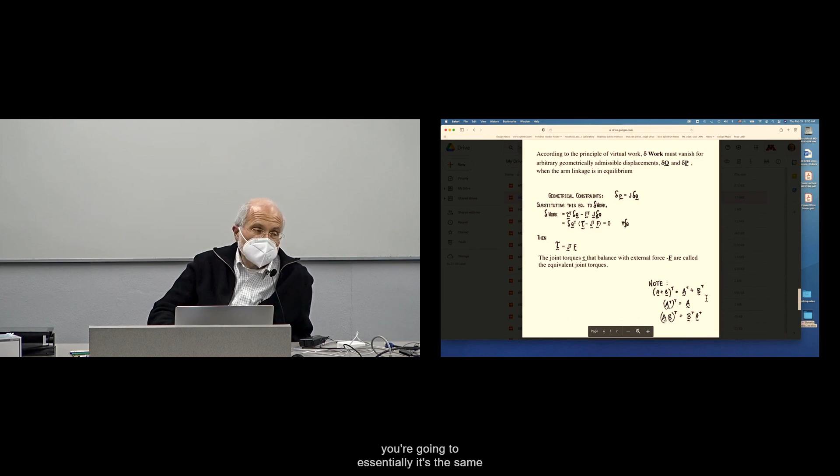of the sum of two, you're going to essentially, it's the same as adding up the transposes. If you take the transpose of a transpose, it's the original matrix by itself. And if you take the product, if you take the transpose of a product AB, then it's equivalent to reordering B and A, and it's the same as taking the transpose of B times the transpose of A.

This is important because it applies to this analysis over here, because we've essentially moved del Q to this side. We had to transpose, move it around, taking into account this result here. Then we take the transpose of the difference, and again, taking this into account, we get this result. So the bottom line is we get this equation.

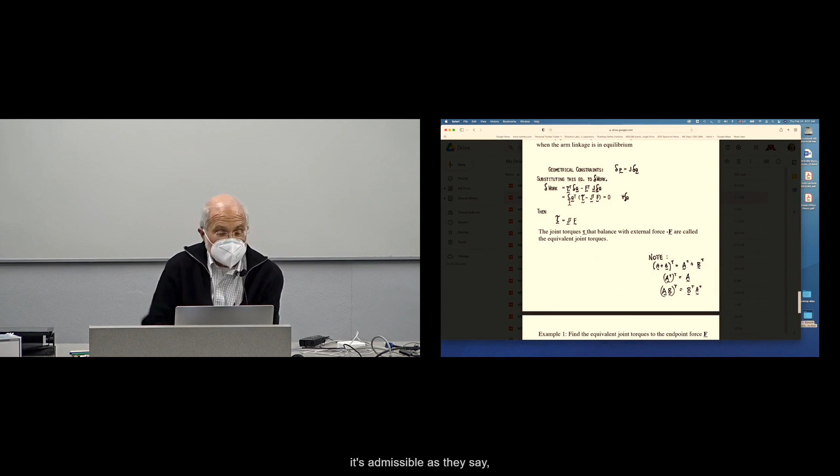We're saying delta work is equal to 0. Well, then if del work has to be equal to 0, and we're saying that this del Q has to exist, it's admissible, as they say, that means this expression has to be equal to 0. That means tau minus J transpose F has to be equal to 0, where if that's the case, that means tau is equal to the transpose of the Jacobian times F.

Now, do you need to sit down and study this at great detail? I'm never going to ask you to derive an equation. That's not what this course is all about.

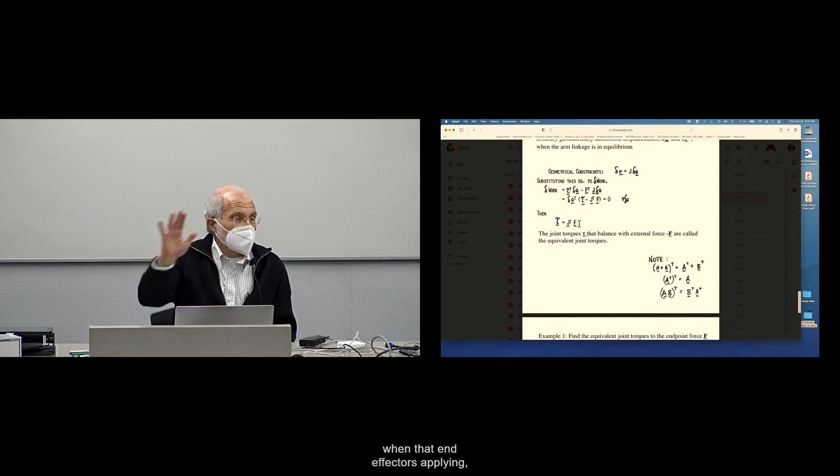But the point is, what is important is to realize that if I have some forces and torques at the end effector, when that end effector is applying, touching the world, touching the wall, touching the table, and doing stuff, there is a static component to all that. And we can calculate, for static conditions, the reaction forces at the joints.

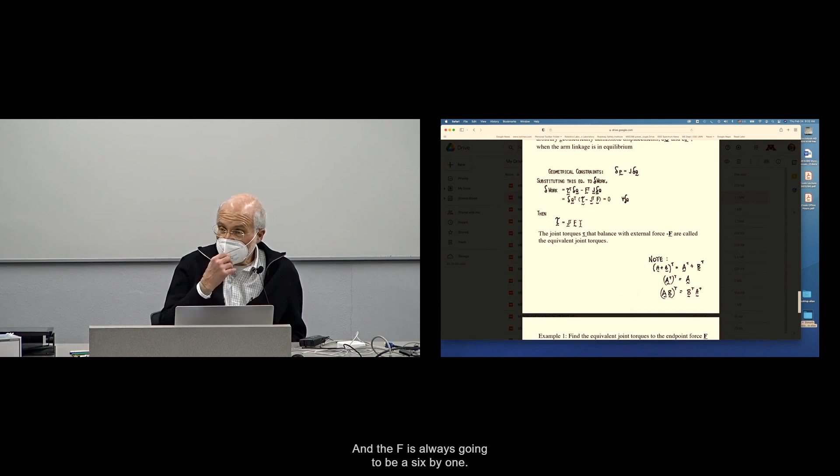These are going to be this set of vectors tau. For 5 joints, tau is going to be 5 by 1. For 6 joints, it'll be 6 by 1. And F is always going to be 6 by 1 - there are going to be 3 forces and 3 torques. To figure out what these reaction joint torques have to be, what the motor has to overcome under static conditions, we basically multiply the transpose of the Jacobian times F.

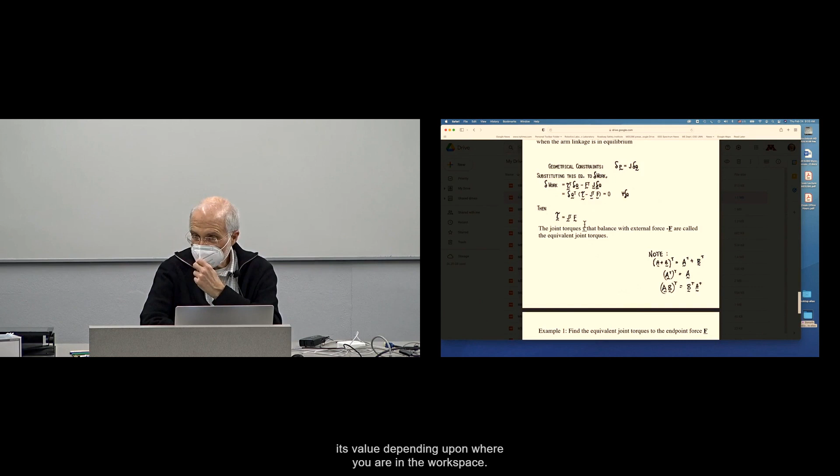Now, just looking at that and trying to understand this a little bit, what you need to remember is that the Jacobian changes its value depending upon where you are in the workspace. So the Jacobian is always a function of the joint variables.

And because it's a function of joint variables, what that's telling you is that the reaction torques at each joint are going to be different if I am pushing at the wall here, or pushing at the wall there, or pushing down on the table, because we're going to have a different set of joints. Still the same work volume.

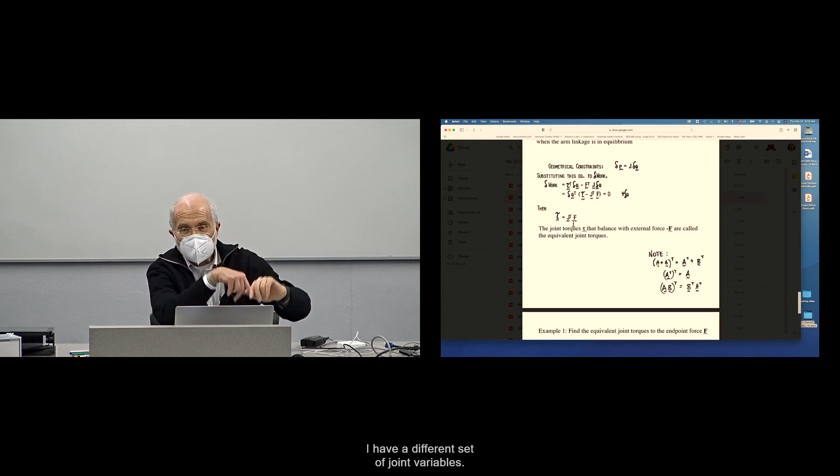The origin of my robot is over here. Whether I'm doing this or doing that or doing whatever, I have a different set of joint variables, and so the reaction forces that I'm going to get at each joint are going to change depending on the position of my system. And F essentially is, we're assuming there is a force torque sensor that's measuring these reaction forces in some experiment in order to calculate what those reaction forces are at the joints.

So let's take a look at a very simple example, just to look at an example that we've looked at before. This is essentially a two-link robot, planar robot, only moves in the plane. Here's theta 1, there's theta 2. There's a torque applied in this robot at the first joint, a torque applied at the second joint.

And assuming over here at the end point, in this time, before we looked at it being two components, velocity along x, velocity along y, now we're basically saying if there is an Fx and an Fy, if we measure the force in the x direction and the force in the y direction that this robot is applying to a particular surface.

If we do that, can we calculate what the two torques are for a particular set of theta 1 and theta 2? We previously went through and I showed you what the Jacobian of this two-link thing looks like. By the way, it's in your textbook—I give you the exact problem numbers in all three editions of the book.

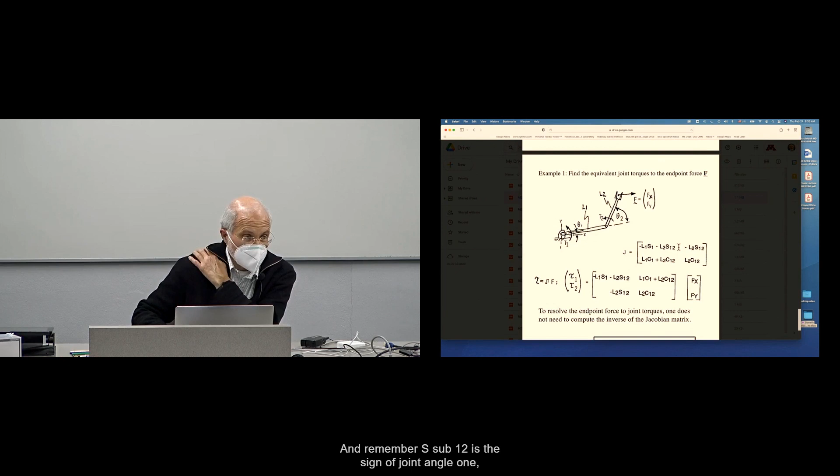This is what the Jacobian looks like. Remember, S sub 1,2 is the sine of joint angle 1 and joint angle 2. If this is the Jacobian, essentially the transpose of the Jacobian—remember the diagonals stay exactly the same, we just swap the off-diagonal terms for a 2 by 2. Very simple transpose.

So if we take the transpose of this, we get this matrix. Here is fx, fy. If we basically multiply these two terms appropriately against fx and fy, we're going to be able to calculate what tau 1 is. And if we multiply minus L2 S12 times fx plus L2 C12 times fy, we are going to get tau 2. So we're able to calculate what the two motors, how much torque they have to apply, and it's going to vary depending upon what theta 1 and theta 2 is. You can calculate it by plugging in joint angles to get the torques.

Again, remember, we're not talking about dynamics—everything is stationary and everything is rigid for all this to apply. And again, I just repeat down here where you can find the derivation of the Jacobians.

Okay, so let's now do another example. This is example 1, and we're going to take a look at example 2. We're going to look at more complicated worlds—we're actually going to look at a force torque sensor and a much more complicated geometric relationship.

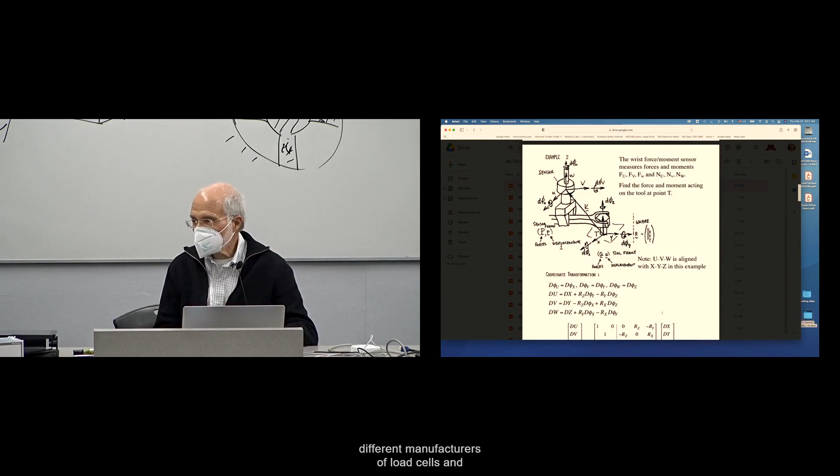We're going to explore a whole bunch of websites looking at different manufacturers of load cells and what they sell, and videos showing what you do with these systems - but we won't get to that until next Tuesday. Today I only have a few minutes left, so I'll do this rather quickly, just to show you the concepts.

Here is my load cell, and it has its own coordinate frame, which is UVW. There's also d phi v, d phi w, and d phi u - small rotational displacements about the coordinate frame. This is a sensor. There's du, the small displacement along the u direction, dv, small translational displacement along v, and dw, small displacement in the w direction.

When you buy a load cell, it will tell you exactly which direction is Fz, Fx, and Fy - it'll be marked on the outside of the sensor. So all measurements in that load cell are essentially in terms of the UVW coordinate frame attached to the load cell.

But when I mount that load cell on the wrist flange of the UR5 - you can see it, take a look next time in your lab - it's black, not very colorful, mounted in between. If I remember correctly, those cost about $4,000 to $5,000 a piece. And today, when you buy a load cell, almost all the processing is done inside the load cell itself.